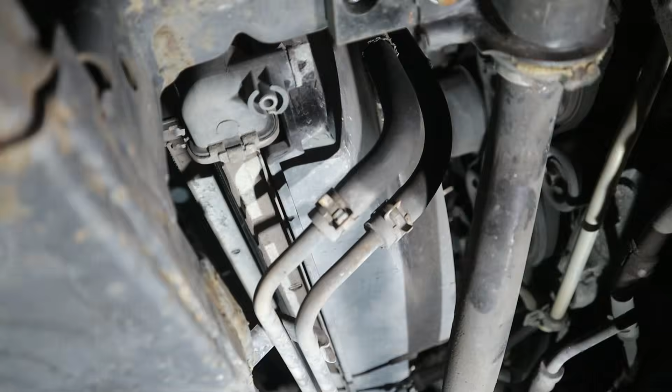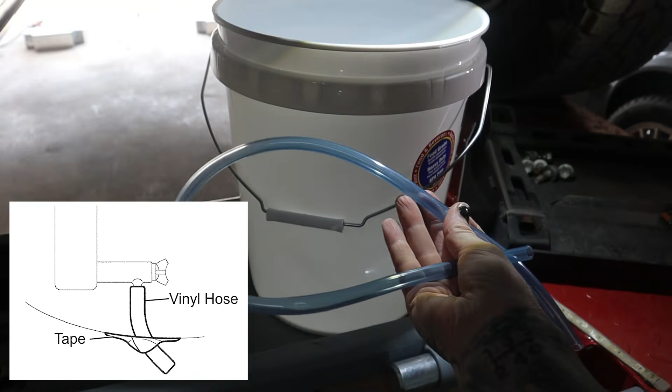We're going to start by draining the coolant on a cold engine, of course, which you can do either by opening the drain at the bottom of the radiator, or by removing the lower radiator hose. Now you can choose to either leave the skid plate on, which may make things a little bit messy, or you can remove it. You can also attach a hose to the radiator drain through the hole in the OE skid plate for an ultimate life hack.

Now I didn't bother with the block drains because they can be a pain to get to, and you're gonna lose a little coolant from the water pump regardless of whether you drain the block or not, so to me it's not worth the extra hassle for the added benefit here.

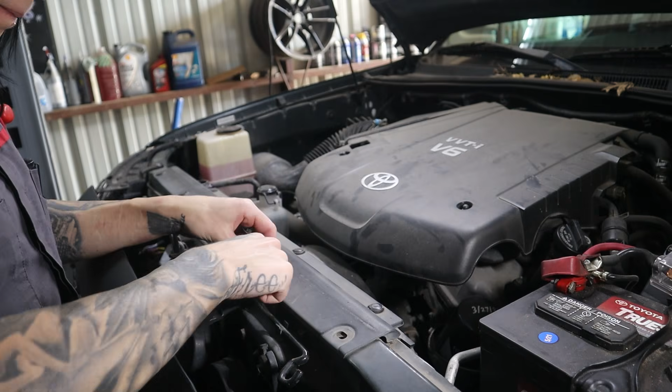There are 9 trim clips that hold this upper air duct into place, so remove them with a trim clip tool or by taking 2 pocket screwdrivers to the slots on either side and pulling up that inner portion. Now if you break them, don't feel bad, we all do, so I linked replacements in the description of this video. Next, disconnect the small hose from the coolant overflow tank.

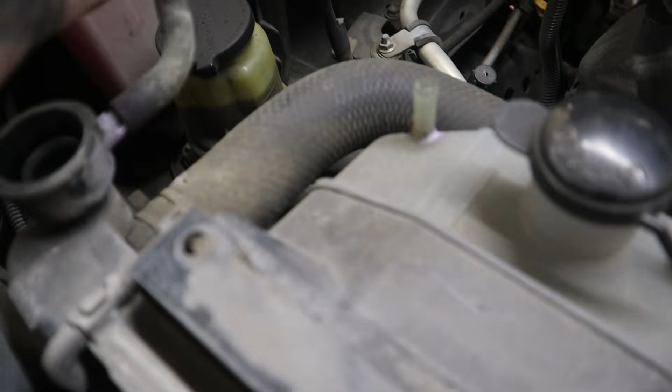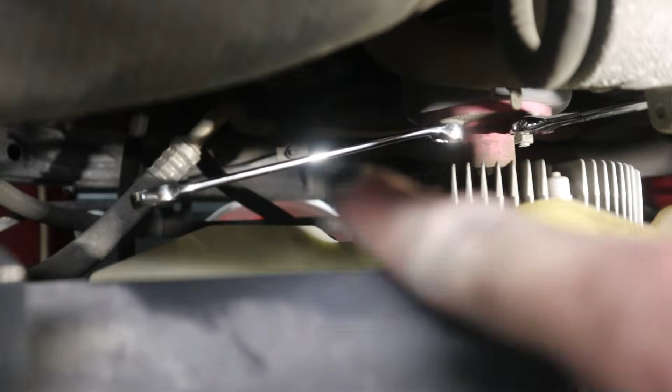Now let's remove the engine cover. It comes off easily by removing these 2 10mm nuts, and then it just pulls right off. Now we're going to tackle the fan, and these nuts are a challenge to remove. You may think at first that they are reverse thread, but they're not. They're just on there really tight. The trick is to use 2 12mm wrenches, one to hold the fan still.

You can see that I'm jamming it here up against the thermostat housing, which yes is plastic, but I've never broken one by doing this, and I'm going to be replacing the thermostat later on today anyway, so even if I did crack this, it's not going to be a problem, but like I said, never had any issues. But if you're concerned, you can also put some cardboard or a rag in between the wrench and the housing to help disperse that pressure that the wrench is applying there.

Now crack the nuts loose 2 at a time and then rotate the fan so you can reach the other 2. So you want to crack all 4 loose first, then you can go ahead and remove them. I like to use the closed end of the wrench to loosen them because you don't want to round off any of these nuts here or your life will be absolutely miserable.

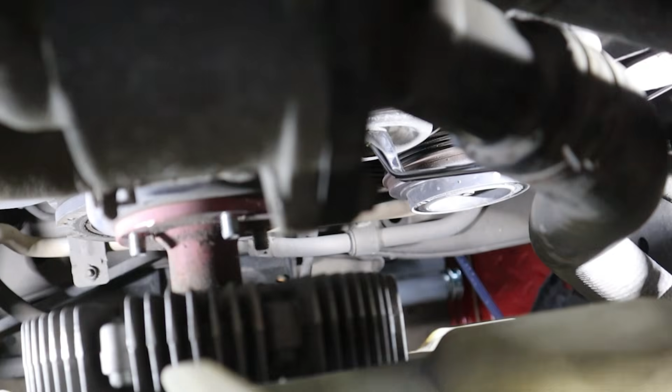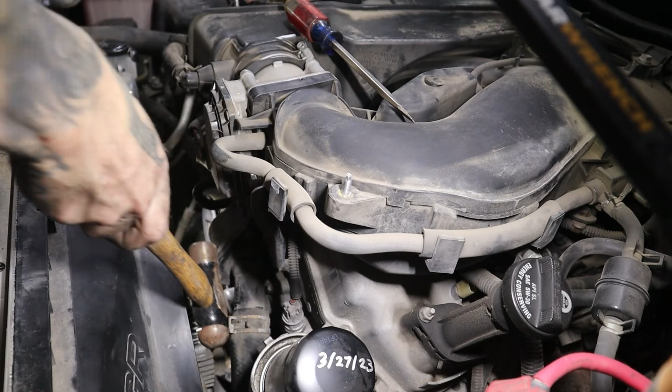After my belt is loose, I'm going to separate the mechanical fan from the water pump pulley. This is also really tight, so I begin by using a little resonant frequency and smacking the side of the base of the mechanical fan mount with my ball peen hammer. And it is okay if you hit the studs here because we are replacing the water pump today, and the new water pump comes with new studs pre-installed.

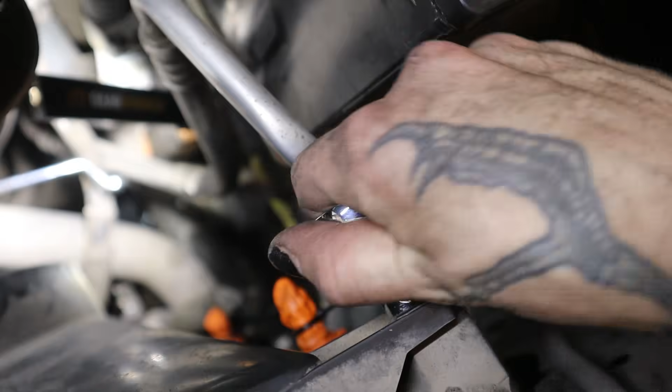Once the fan is broken free, I like to use a flathead screwdriver to gently pry around the base of the fan mount. Make sure to rotate it constantly so that you're pulling it off evenly and you don't end up wedging the base crooked onto the water pump studs. Now once the fan is loose, you can set it gently inside of that shroud because we're going to be removing these 2 together. Remove the 2 10mm bolts holding the shroud to the radiator. Unclip the transmission cooler lines from the shroud and remove the fan and the shroud together as a unit.

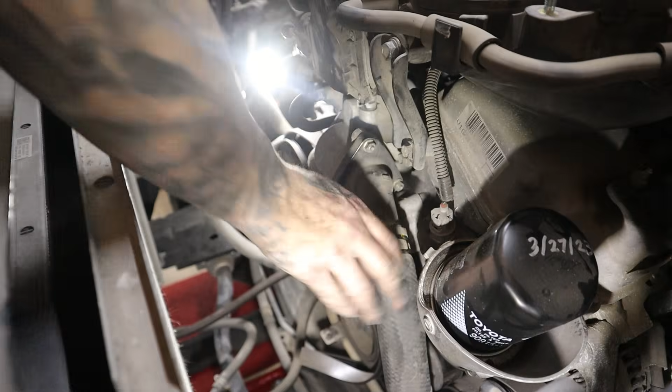Next, we will disconnect the 2 radiator hoses, one from the water pump and one from the thermostat housing. And I highly recommend a pair of these hose clamp pliers like I linked in the description, but regular pliers can work in a pinch. If your hoses are difficult to remove, you can also use a hose pick tool like this one that I'm demonstrating here.

Now, you will also see that I removed the radiator in this video, and that's because I upgraded it at the same time to overlap my labor.

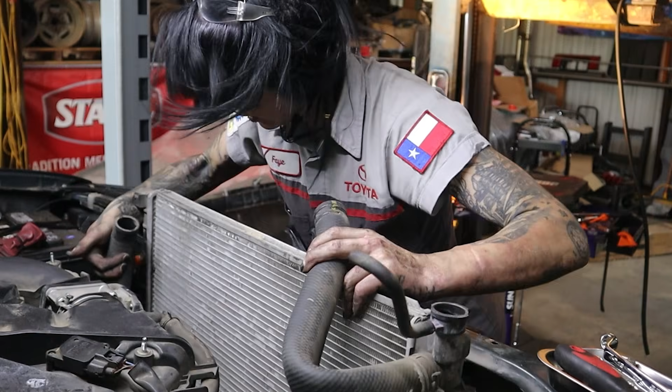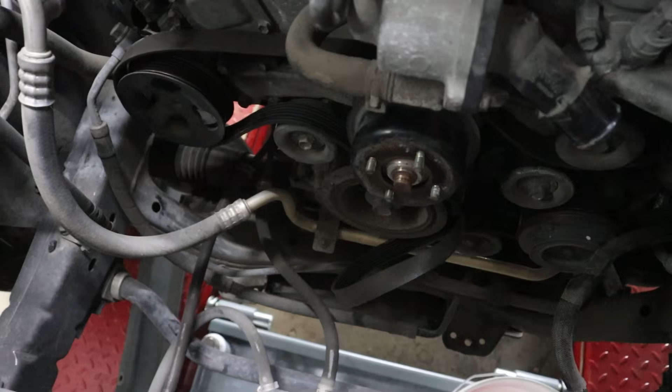But if you're gonna leave your radiator in place, I think it's a really good idea to place something like a piece of cardboard in front of the radiator to prevent any damage from happening to the fins while you're swinging tools around in there. Now remove that drive belt and water pump pulley.

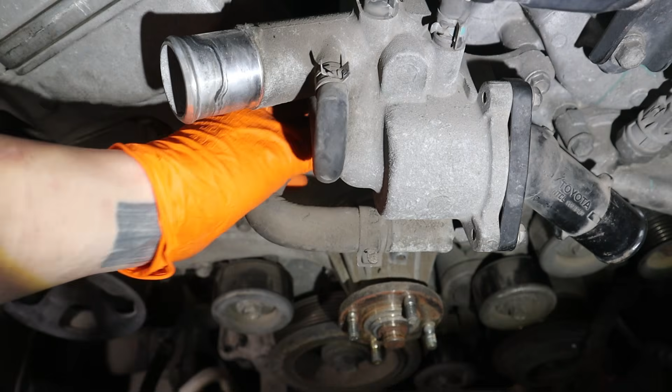And here you can see the water bypass hoses that I'm going to be replacing today. These should be nice and firm, and you can see that these have gotten soft over the past 190,000 miles, so I'm performing some preventative maintenance. I would hate for one of these to burst when we're out in the middle of the desert. Some of the places that we like to go are pretty remote.

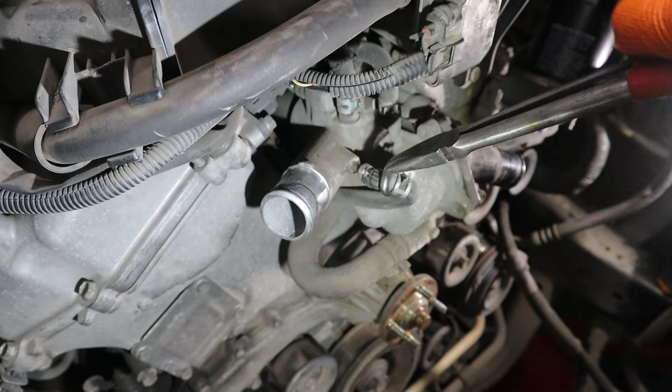So while I'm in here, I'm going to remove and replace every single one of these, starting by detaching all 5 of them from where they connect to the water inlet housing. I'm using a combination of different pliers here. I've got hose pliers, 90-degree pliers, and these regular, I don't know what you call them, gear wrench pliers to remove these. And now the larger one on the bottom will leak some coolant if you didn't drain the block, but you can see this is not a big deal. Don't forget that hose number 5 is hiding in the back here.

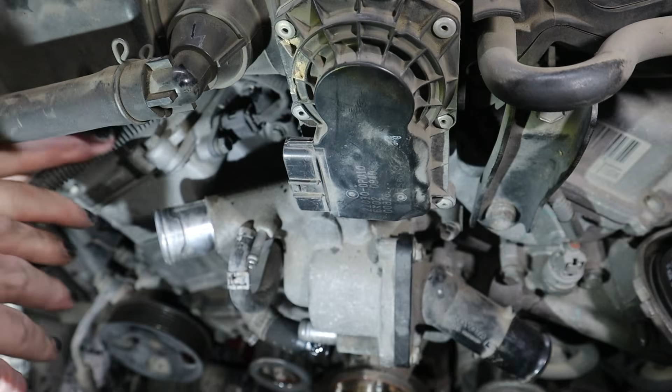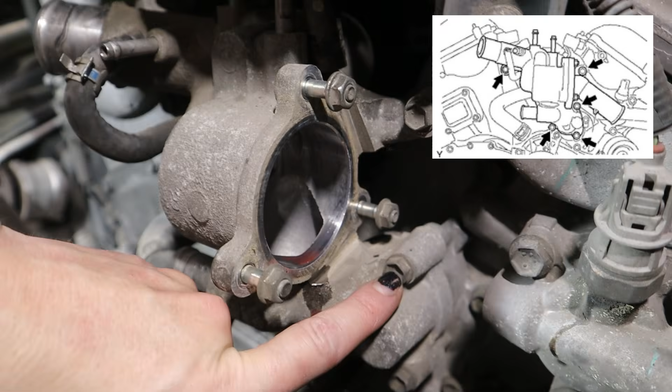And I'm also unplugging the throttle position sensor connector now so you can see what I'm doing back here a little bit better, but this is going to be coming off soon anyway so I can get to the other side of these hoses. Now I'm removing the 3 10mm nuts securing the plastic thermostat housing to the water inlet. I'm threading them back on to keep from losing them later on, and now let's remove these 5 10mm bolts that hold the water inlet onto the front of the engine. The 2 lower ones are a little bit tricky to see, so I'll point these out to you.

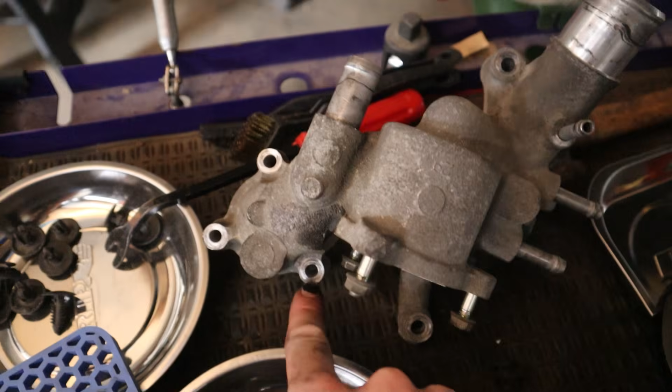Once you've got those off, remove the water neck with a side-to-side motion to get past that rubber O-ring that it's stuck on. And here are the bolt locations with the inlet removed, which is a little bit easier to see. All of these bolts are the same length, so don't worry about keeping track of which ones went where.

And while I'm in here, surprise, surprise, I'm performing some more preventative maintenance. These pulleys are okay. I mean, they're not making any noise, they roll smoothly, but they're a little bit old. Normally the bearings shouldn't have any side-to-side play, and when you spin them, they should move smoothly, but also come to a stop pretty quickly, as the bearings are packed with grease inside, and that will slow them down. If they roll a little bit too freely and take a while to come to a stop, that's actually a sign that they have lost grease, which isn't the end of the world, but it just means that they're wearing out.

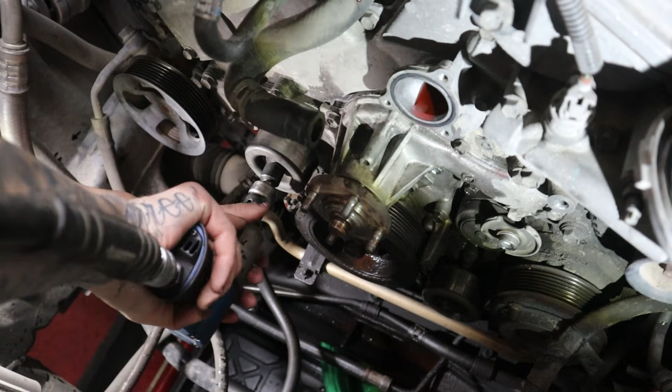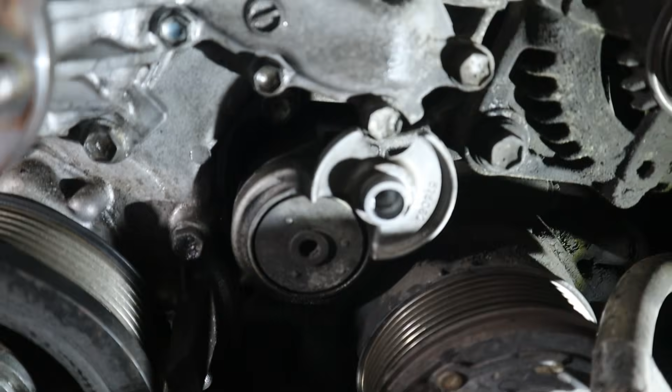The tensioner bolt is left-hand thread, like you'll find on most Toyotas, and you can tell because the bolt is labeled with an L. Now that these are out of the way, let's remove the water pump. Please note that there are a couple different sizes of fasteners used here, one with a 10mm head, another with a 12mm head. These two are also different lengths, but the same lengths as each other. Keep track of how you remove them.

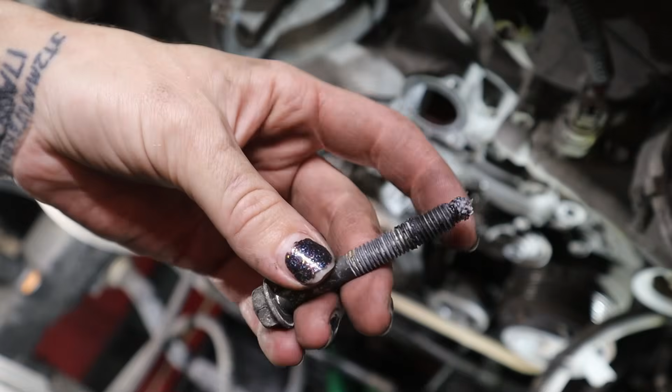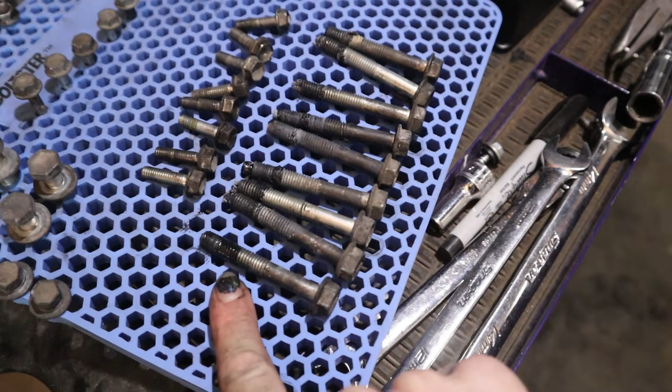I recommend using the new water pump as your bolt holder, or you could also make yourself a cardboard template to stay organized. But really, this image that I have on the screen right now will probably be all you need. Check this out, you can see that there is some Toyota form-in-place gasket on the end of these longer bolts, so we'll make sure to clean these thoroughly before we reinstall them with the new sealant. Here are all the bolts, and you can see that all the 10mm bolts are the same length, and all the 12mm bolts are the same length.

And here is the old water pump and gasket. Nope, it had absolutely nothing wrong with it. Here are the 2 O-rings I will be replacing today.

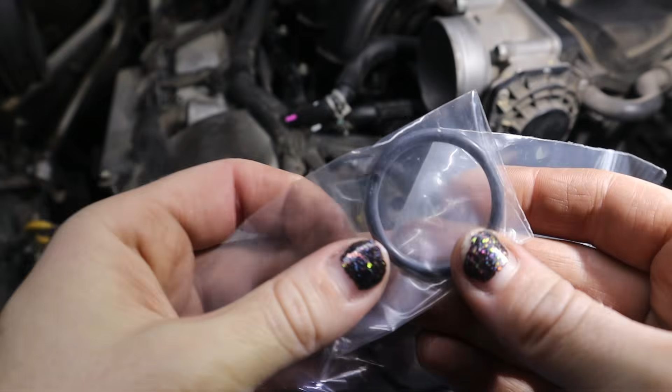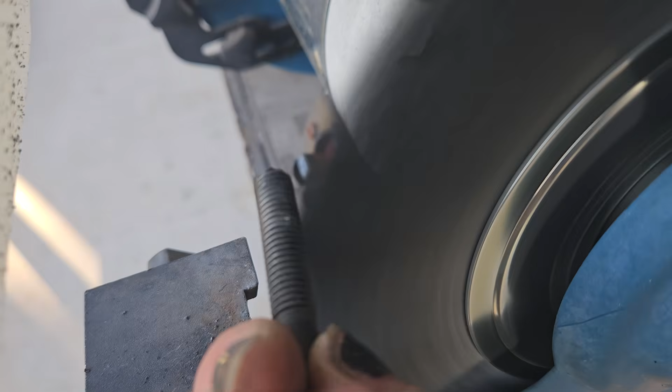Let's get this first one installed. I'm using my 90-degree pick to remove the old O-ring from the upper coolant pipe and clean off any corrosion or coolant crusties with a little piece of Scotch-Brite pad. I also lubed up the new O-ring with a little Sil-Glyde before installation. Now I'm prepping my water pump bolts by getting all this old gasket material off of the threads.

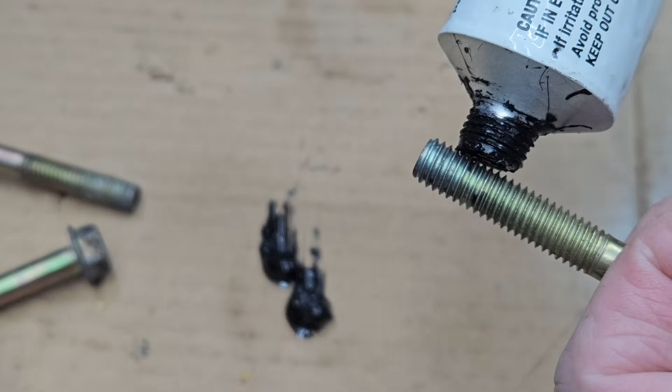So this is the Toyota form-in-place gasket that we're going to be installing on those longer bolts. Now once you apply this, you have 15 minutes to install them before this formula starts to cure. So I tend to apply this at the very last minute. And all we need is just a very little bit on the tip here. I also clean the sealing surface for the water pump as well, but with a rag only. No Scotch Brite or razor blades here with the metal gasket style.

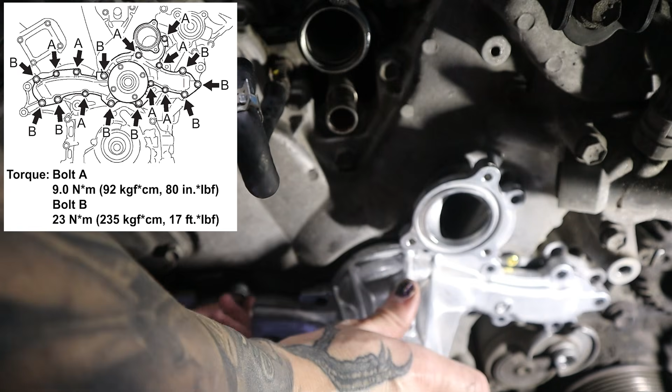I always start by installing the water pump loosely with all the 10mm bolts first to hold it in place, since these don't require any form-in-place gasket. This ensures that my holes are lined up and the gasket is held into place. Once again, check out this diagram from the factory service manual if you need help figuring out where the bolts go. And I also listed the torque spec here. The torque for the 10mm bolts is 80 inch-pounds and the 12mm bolts are 17 foot-pounds. And I'm torquing them in kind of a modified star pattern here.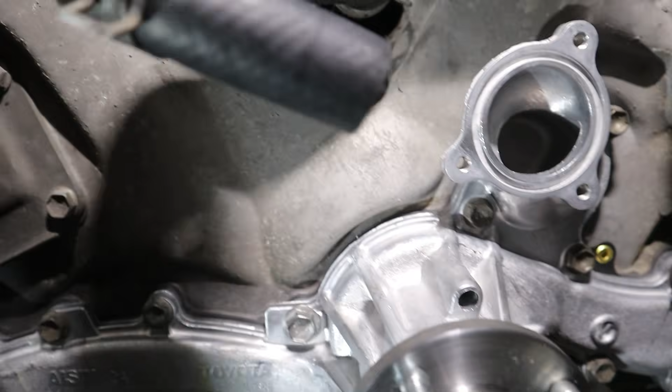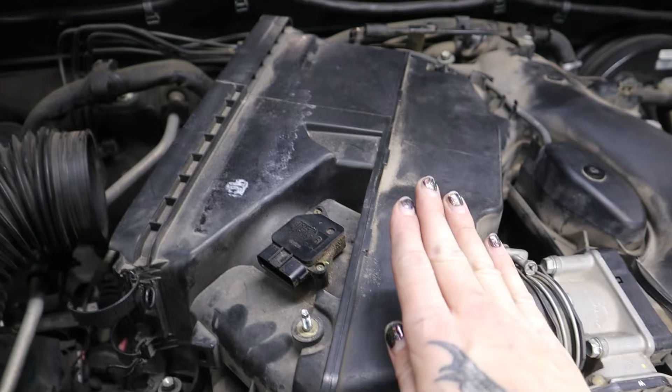So check this out, you can see I have a bunch of new coolant hoses going on right here. And actually in order to see all of these and replace these really easily, I just removed this upper intake plenum. And in order to do that, we've got 2 10mm bolts. We've got one right here and one right here. We have another 10mm right here that's gonna detach the air intake box from the throttle body. I did remove this connector right here, another electrical connector right here for the mass airflow sensor.

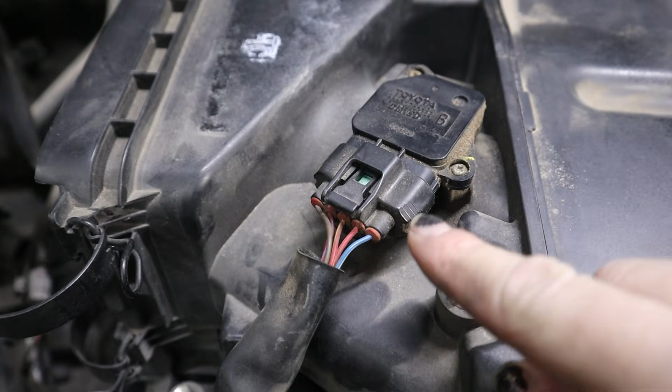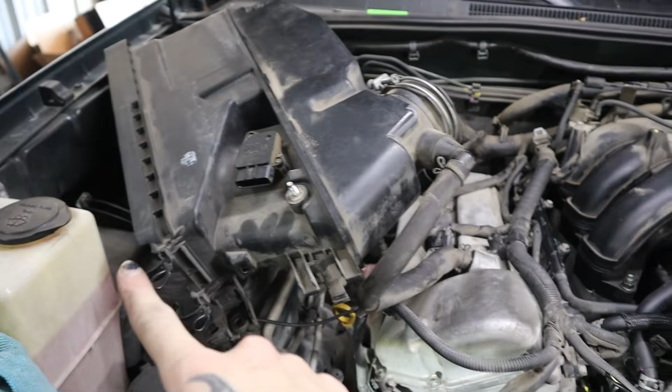And then most importantly, when you're removing this, just make sure that on the back side, there is this little vacuum hose, which you can see I haven't reconnected just yet. That goes to the fuel pressure regulator. When you're pulling this off, quite often you will break this nipple. So just be really, really careful and make sure that you undo this from the fuel pressure regulator if you can, or right here, just give it a little twist and get that right off. I just set it aside and I even just leave that hose attached. But importantly, back here, that is the fuel pressure regulator and that's where that vacuum hose is gonna go.

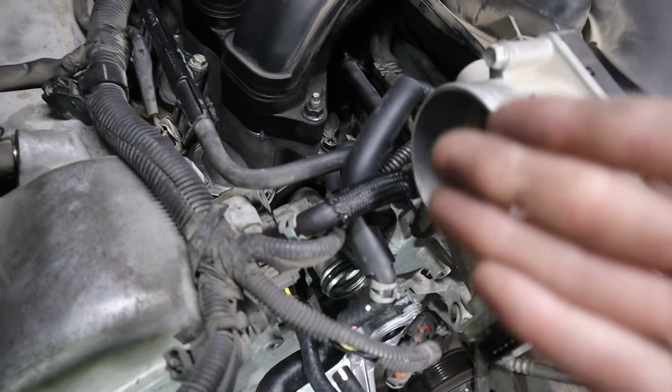So just make sure. So now that everything is out in the open, we can see how much easier it is to replace these hoses when you can access everything. So there's 5 total that I replaced. This large one right here, 1, 2, 3, 4, and 5 is this one down here. All of those little coolant bypass hoses are brand new.

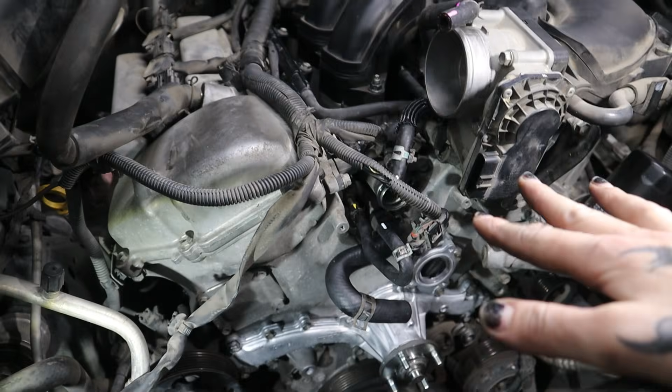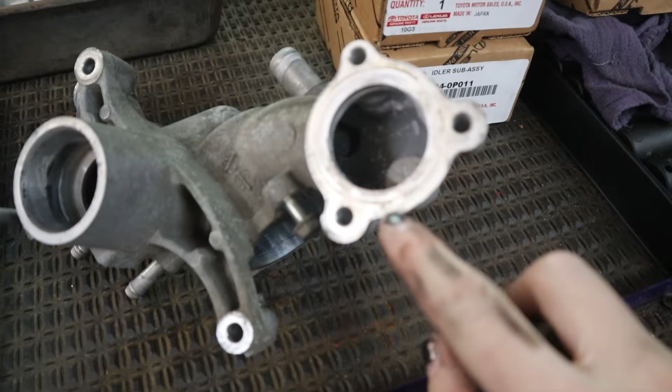Before reinstalling our water outlet, we're gonna clean this surface right here with just a little bit of Scotch Brite. We just obviously don't want to take off anything except for any corrosion there because that is the sealing surface. You can see it's got a little bit of corrosion. So we're just gonna go ahead and clean that off, and then also the inside of here, because we've got an O-ring that's gonna sit here and the O-ring that's gonna sit here. There's how everything looks, nice and clean. It looks beautiful and nice and smooth.

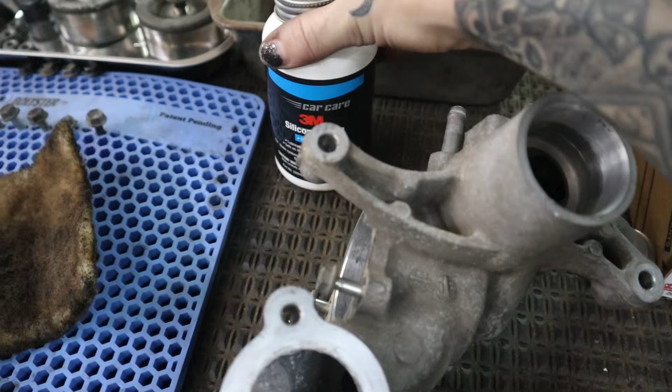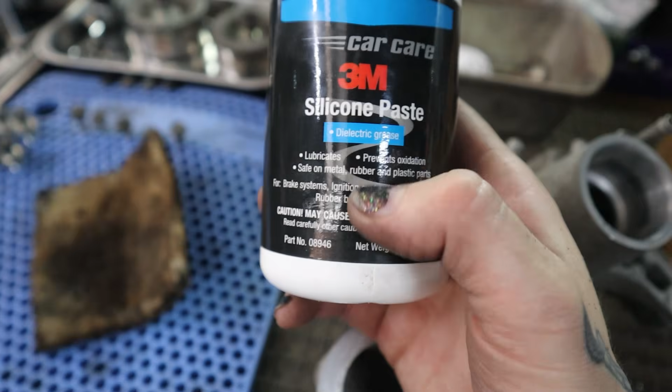And now I'm gonna go ahead and apply a little lube. If you don't have this sort of lube, you wanna make sure that whatever you're using is safe for use on rubber though, because sometimes you can use a type of lube that will actually make the rubber swell, and you don't want that. So if you don't have something like that, a good rule of thumb is you can also lube with whatever substance is gonna be on the material. So in this case, you can use coolant. Just put a little coolant in here. Think about it, coolant is totally slippery.

But in this case, I'm just gonna put a little bit of lube here. Nothing crazy, just on the surface. And it also helps to do a final clean as well. More importantly though, we're gonna put lube in here, just so we don't rip that O-ring or mess it up when we're installing that. And I've got a little bit of that silicone paste I'm just gonna put on this O-ring. I'm also gonna install this O-ring, also with a little bit of lube just so that it sticks and it doesn't fall out while I'm installing it.

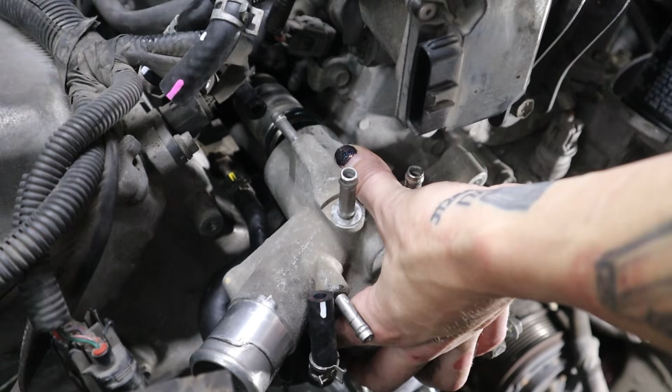Now it's time to reinstall the water inlet. I'm sneaking that rearmost coolant bypass hose on by getting my fingers behind the hose clamp for leverage, and here are my 5 10mm bolts. Going back together here is pretty much just a reverse of removal, but we're gonna go through every step anyway. Why not?

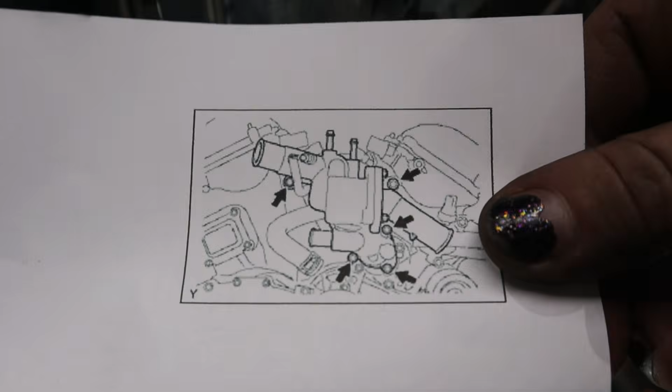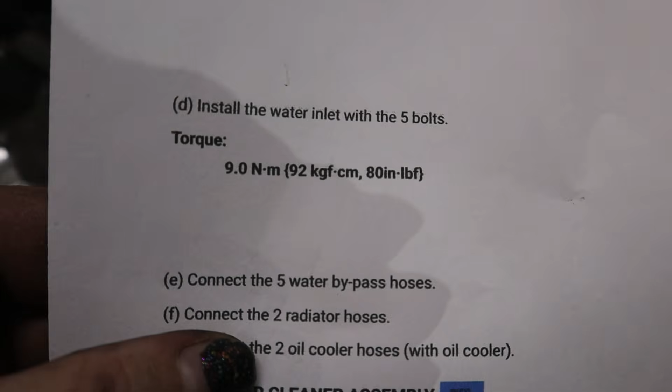Here in the factory repair manual, we can see the location of all those bolts. And here is the torque spec. We're only doing it 80 inch-pounds. Oh my gosh, so small. So just make sure that you don't over torque that. Next, let's connect those 5 water bypass hoses.

There we go, all 5. This one in the back, 1, 2, and 3, 4, and 5. Now let's get our thermostat housing installed.

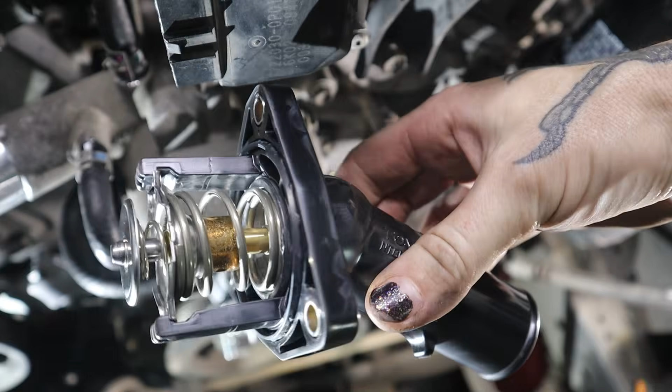So here is the new thermostat, genuine Toyota. There's the part number. Let's remove these 10mm nuts that I strategically placed where I couldn't possibly lose them, and sandwich this thermostat housing in between them on these studs. The torque spec for these is 80 inch-pounds.

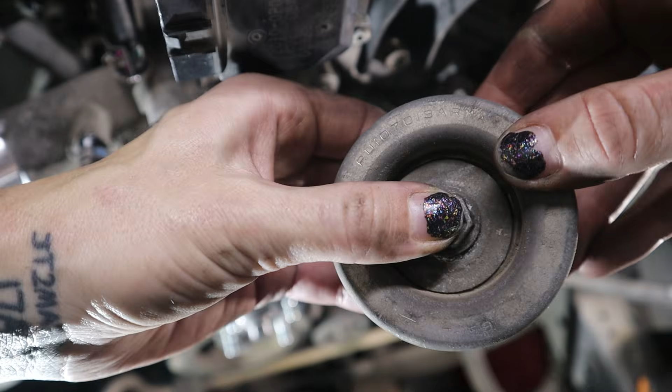Now I spun all of these when they were on the truck, and I was just looking for any feelings of excessive looseness in the bearing or grittiness. And I did not notice any sound being made, and that's typically the first thing that you're gonna notice when any of these pulleys go bad.

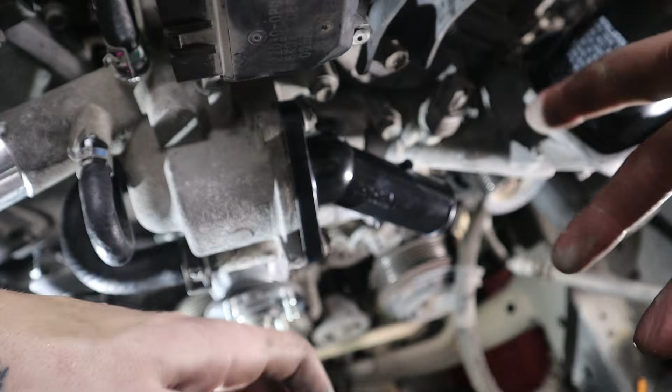The reason why I'm replacing these is because I've been researching a lot on the supercharger kit lately, and it seems like the only failure people have had at all are just their old pulleys, and it has nothing to do with the supercharger either. It's just neglect. So while the belt is off, I'm just gonna replace these. Everything's apart. It's so easy to replace them now, so why not save myself the hassle later on? So let's grab the new ones.

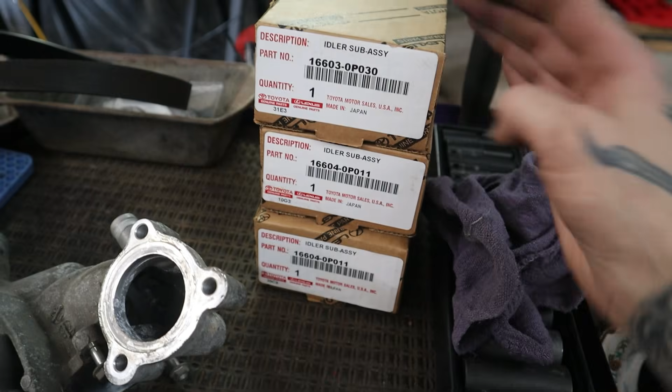I'm going to replace all of my idler pulleys. You can see that when I ordered them, I got 2 that are identical and 1 that is different, so I'll show you where all those go. And I also got the tensioner as well, and that makes up all 4 of our pulleys. And there's the part number for the tensioner.

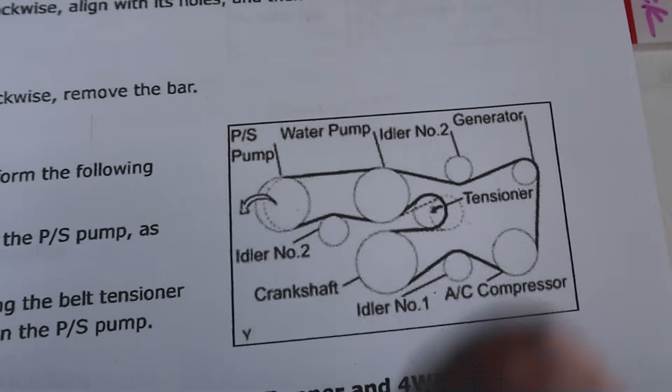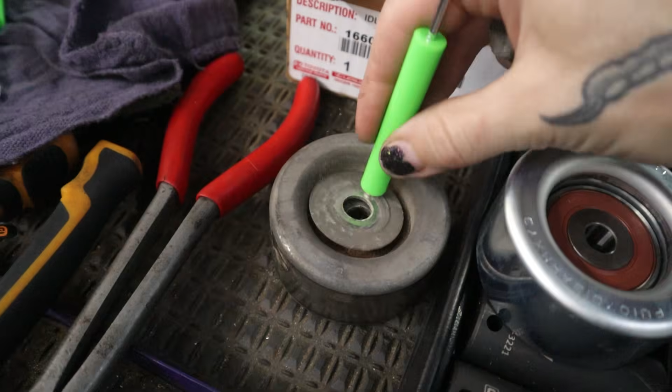So if you look at our diagram here, you can see we've got 2 idler number 2s, 1 idler number 1, and then the tensioner itself. So 4 little rollers total. So we're just gonna swap over this bolt and washer. I am gonna clean up the bottom of that washer a little bit. Okay, there we go, nothing crazy. Do the same for the other one. Get that installed.

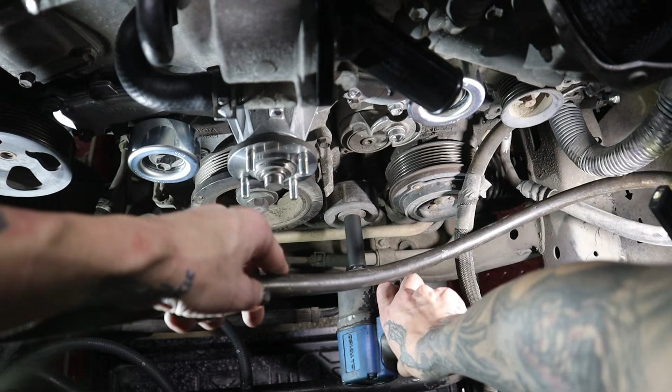And the torque spec for both of these is 29 foot-pounds. So these guys are my 2 number 2 idlers according to the factory service manual. And now let's get the idler number 1 down at the bottom next to the AC compressor. There's the old and the new side by side.

And prior to install, I just cleaned off a little bit of dirt and mud that had caked itself onto the bottom of the block here. This idler has the same torque spec of 29 foot-pounds. I did find it easier to reach this pulley from the bottom, but if you have longer arms than me, you can probably get it from the top as well.

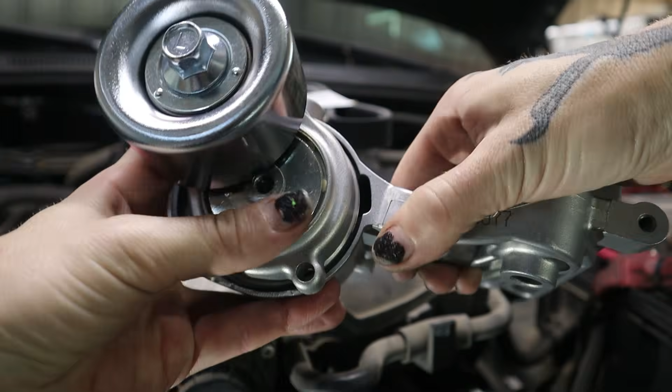Now this is the entire tensioner assembly, and I'm not going to be replacing this today. Heck no. What I am going to do though is swap over the pulleys, and I'm going to keep this tensioner for another time. Maybe I'll do it when we have to replace the AC compressor or something like that. So all I did was remove it from the bracket, and now I'm installing just the pulley onto the old bracket. The tensioner itself was in great shape. I didn't hear any belt slipping or noise at all prior to this job, so just the pulley replacement at this point is fine. Remember, this is reverse thread.

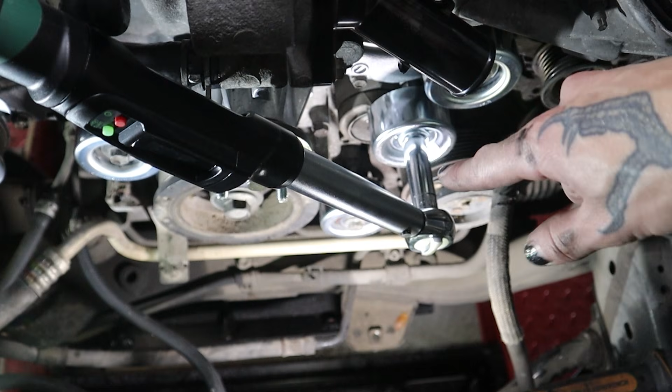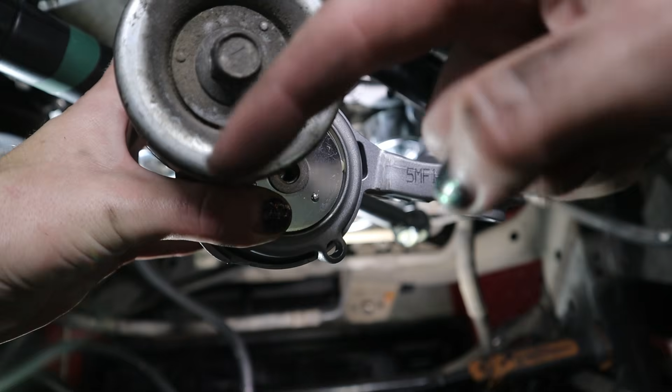As I'm rotating the torque wrench in order to torque that pulley into place, you're seeing that I'm also moving the tensioner. So this is perfect. It's gonna basically solve two problems at once. Here's my new tensioner but old pulley. What I wanna do, as I'm tightening this to torque it, it's gonna bring this part of the tensioner around, and I wanna line up this hole with this slot. And that's gonna keep it tensioned and keep this pulley out of the way so that I can put the drive belt back on.

So I've got this little 5/32 Allen wrench here, and that fits in there and also in there. You can use anything. You can use a little screwdriver as long as you have enough room for it. So I'm gonna start torquing this bolt, spin this around, and then insert this. So then I can finish torquing this bolt right here, and then I'll lock the tensioner in place, and then I'll be able to install the drive belt. So let's do this. Oh, the power steering hose is in the way.

There we go. Okay, so you can see my little Allen wrench there is in place, and the tensioner is definitely stuck in the loosest position right now. So it's locked in place, so we're gonna torque this. Here we go, 29 foot-pounds. So now we'll install the water pump pulley.

There we go. And for the sake of installing the drive belt, we're just gonna temporarily install a couple of these nuts here because we want the drive belt on before the fan, and then we're gonna put the fan on after that. So there we go. You can use your old drive belt or replace it. This is the brand new one with the part number.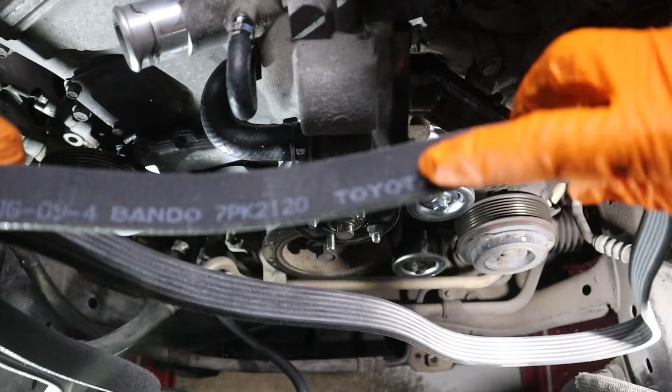So let's get this on. And I'm a weirdo, but I like the words to face me. And one thing I like to do is make sure that I install the belt over the ribbed pulleys with the big lips first, because those are going to be the hardest to get over once the belt has a lot of tension on it. So we'll normally put it over the smooth tensioner pulley last, but whichever way works for you. There's really no right or wrong way to do this.

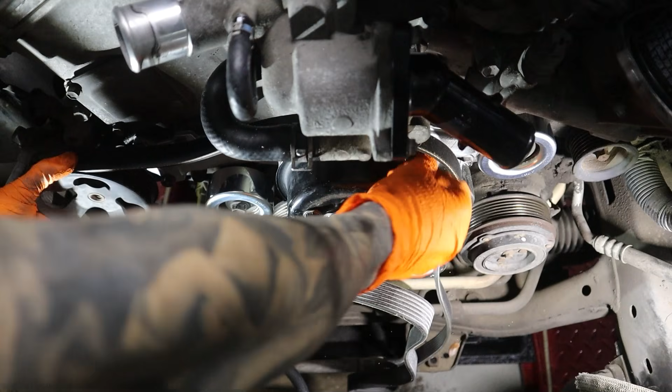But we'll just start with the power steering over here. And then we're going to go up over the water pump. And then this side, we've got the smooth side going over this idler, and then the ribbed side is going over the water pump. Perfect. Smooth side over the other idler there. Ribbed side over the generator. Going around the AC compressor. Idler. Crank pulley. There we go.

Getting it over the ribs. And then the last one. See how you can just sort of slip it back over the tensioner there? And we just make sure everyone's in their grooves, and it looks like it. So there we go. Power steering, idler, up under the water pump, over there the tensioner, down around to the crank pulley, little idler, up over the AC, over the generator or alternator, here to our other idler, and back up over the water pump.

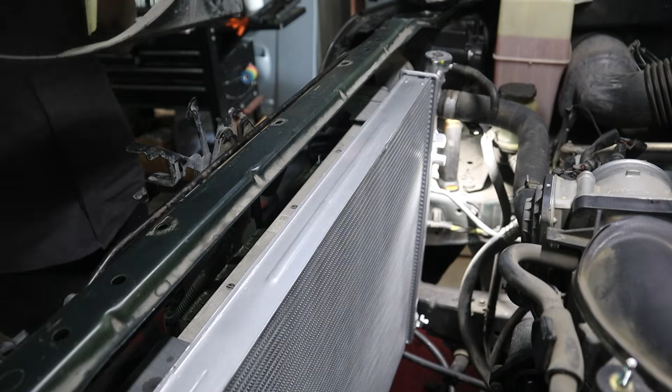And there we go, and it's loose still, so now we're gonna release tension on our tensioner pulley there, and we're gonna pull out our little tool that's holding the tensioner into place. Now let's remove these nuts and install our fan and the shroud. You may have noticed that a new radiator has magically appeared, so some time has elapsed.

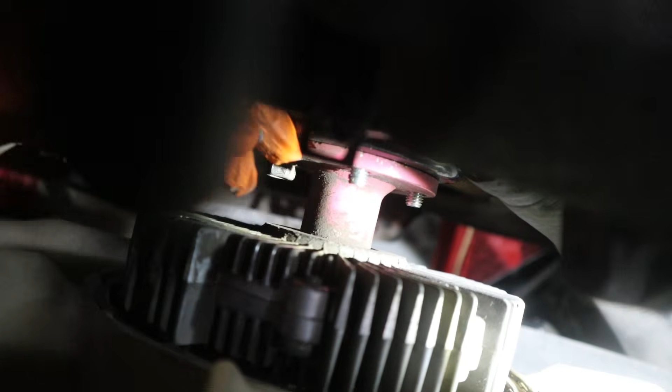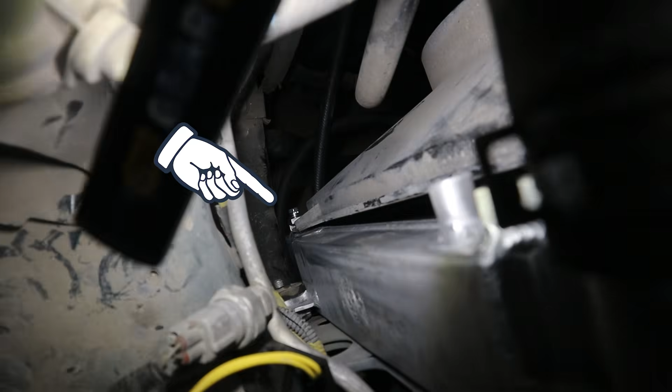Once again, I'm installing the fan and the shroud together as a unit, hanging the fan on the water pump studs and hand tightening a couple of nuts, then securing the shroud to the radiator by sliding these two brackets into place at the bottom. This CSF radiator features bolts on the bottom brackets, which the OE does not, so in my case, I'll be tightening those two, but you can just worry about tightening the two 10mm bolts up on top of the shroud. Then don't forget to clip these two transmission cooler lines back into that little fastener on the bottom driver's side of the fan shroud.

So now as we're tightening those nuts that go from the mechanical fan to the water pump pulley, you can see I've got my long box end wrench. I love this one. Both sides are enclosed. This one's a 14 and that one's a 12. So as you can imagine, I use this on a lot of Toyotas. So I've got it on one of those bolts, and you can see that I've got it wedged along the metal part there. I'll be able to get a wrench on the other side and tighten each one of these.

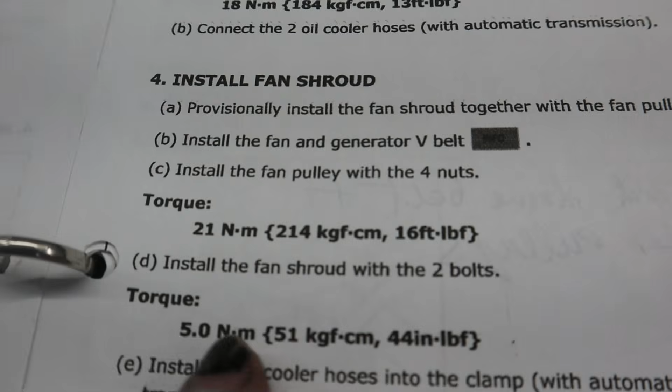Yes, I know they're impossible to remove, but look, 16 foot-pounds. That's all we're doing, you guys. I'm going around and tightening them all snug first to seat the fan evenly, then do my final tighten. Don't hate me, but I didn't use a torque wrench here. I just used my calibrated wrists. But I promise, it's fine. I filmed this video half a year ago and it hasn't fallen off yet.

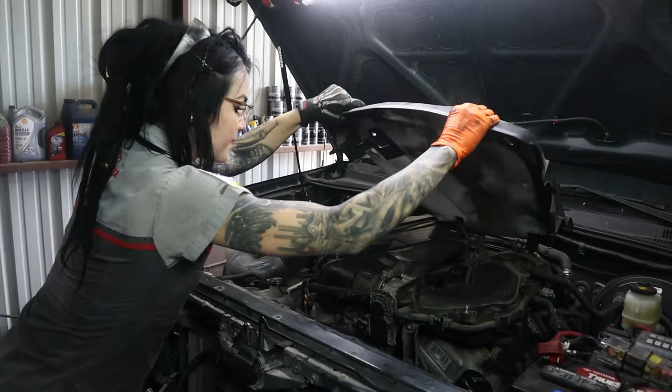All right, let's get the overflow hose back on, reinstall our radiator hoses, and get that intake back on. I tighten it down with those two 10mm bolts, being sure to connect the vacuum hose for the fuel pressure regulator in the back, plugging back in our mass airflow sensor and throttle position sensor connectors, and tightening those hose clamps. Lastly, we have our engine cover and these two 10mm nuts and the air duct that sits on top of the radiator with those 9 trim clips.

And that wraps up the water pump, thermostat, drive belt, pulleys, and the water bypass hose installation. Now, all we have left is filling and bleeding the coolant.